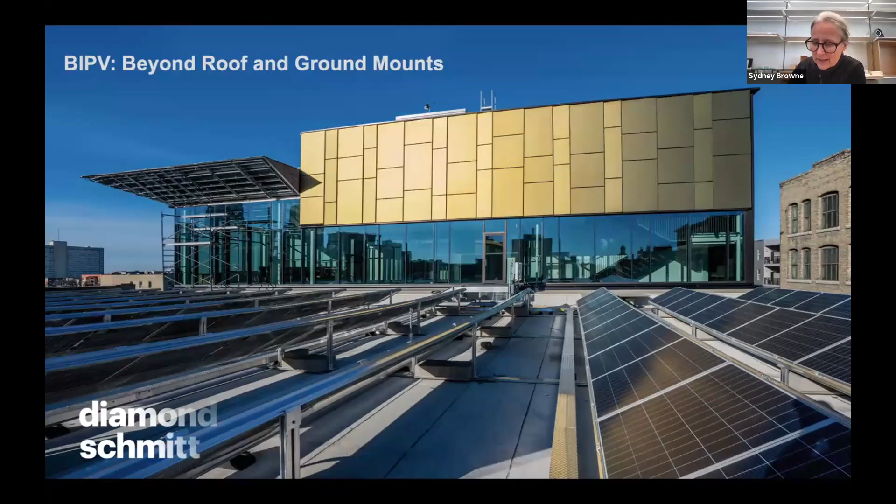Thanks so much. As Tyler mentioned, I'm an architect and a principal with Diamond and Schmitt. I'll share a little about our firm. Our firm is a group of over 300 architects, with studios in Vancouver, Calgary, Toronto, and a group in New York.

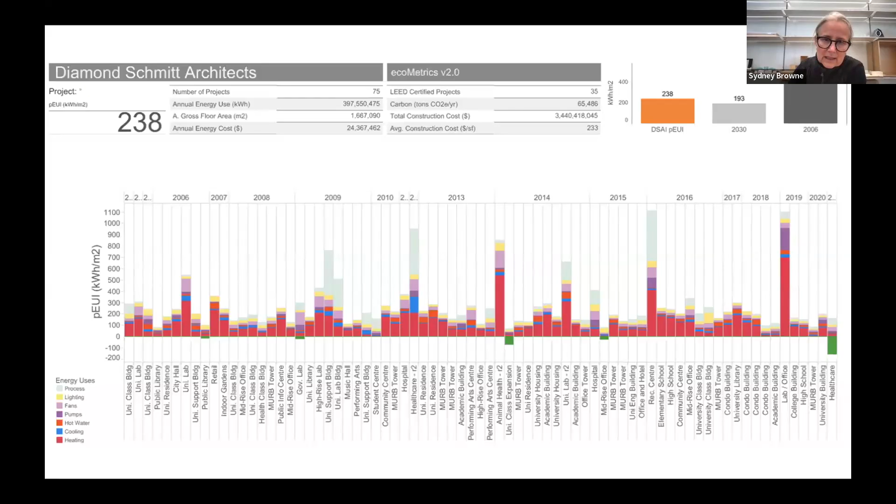That path has taken us in a number of directions over the last two decades, but the group of projects I'm going to speak about today are a selection from the handful you see on screen. We've been working with photovoltaics, building integrated photovoltaics, as part of our design work for some time, and over the last decade we've learned a lot and continue to learn through each one of these projects. I'll take you through a handful of these projects fairly quickly, but at the end of my presentation and Adam's, we'd be happy to go through questions you may have.

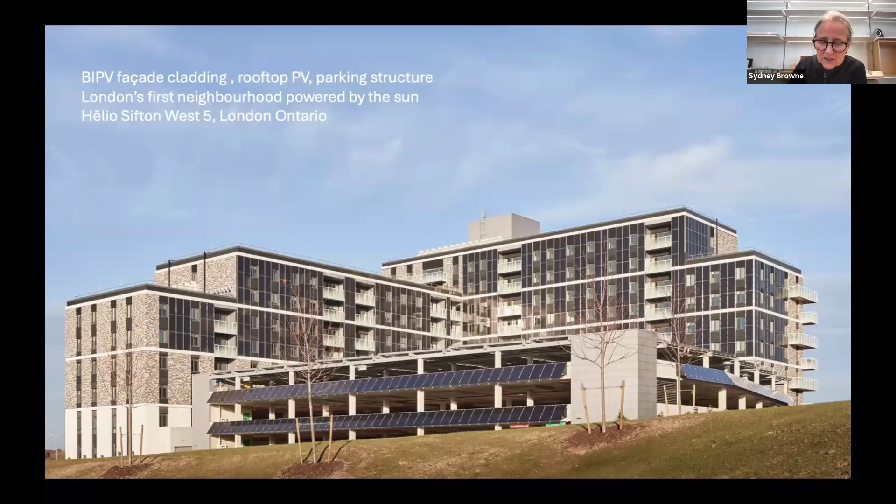This project made use of standard components as part of the exterior cladding system. As a continuation of our work with Sifton, we then worked with them on this multi-unit residential building. You can see on the facade of this building and the adjacent parking structure that in both cases the facade incorporates standard PV panels. What we were doing was taking the kinds of panels installed on the roof of those projects and looking at ways to incorporate them as part of the exterior cladding system, taking the vertical plane and developing it in a way relatively consistent with what's being done on the roof.

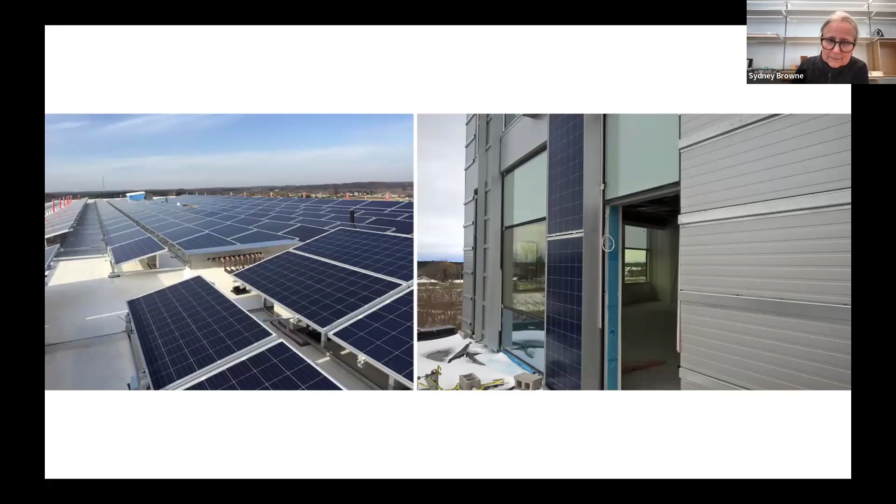Whereas the roof system on the left is added on top of the exterior roofing membrane, the facade on the right starts to take these panels and integrate them as part of the exterior cladding system. The challenge was to take these standardized, repeated modules of fixed dimensions and develop a series of details that could adapt those standardized panels to the customized detailing required as part of a more integrated building facade.

Again, just a test installation and not as fully effective in terms of output as the cladding, but we felt certainly worth installing as a test case in this scenario.

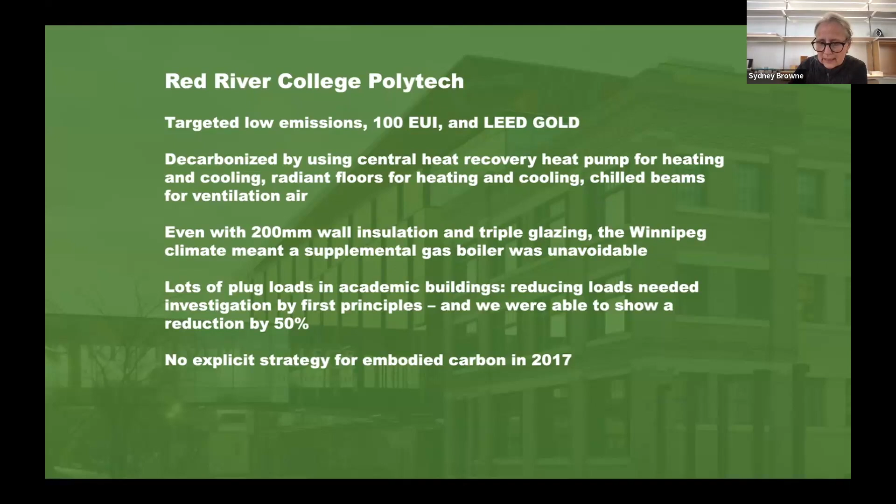At this point, we were very fortunate to take on a commission with Red River College Polytech in Winnipeg, for their innovation center. The college was really interested to see what could be done to develop a much more innovative approach that took energy use very seriously in an integrated way. This project was targeting an energy use intensity of 100 kilowatt hours per meter squared per year, as well as LEED Gold.

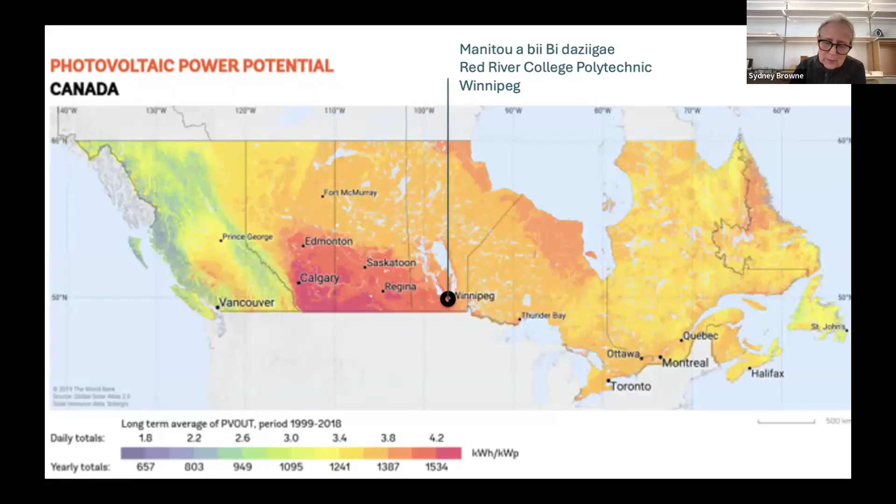This idea of making a much more holistic, integrated, energy efficient project began to lead us in a number of directions explored throughout the design process. This map shows the photovoltaic power potential across the country, and as you can see, Winnipeg is on the periphery of central Canada, one of the most beneficial areas in terms of long-term, year-round PV potential because of exposure to sunshine. So this we felt was a really promising starting point for incorporating PV into this project.

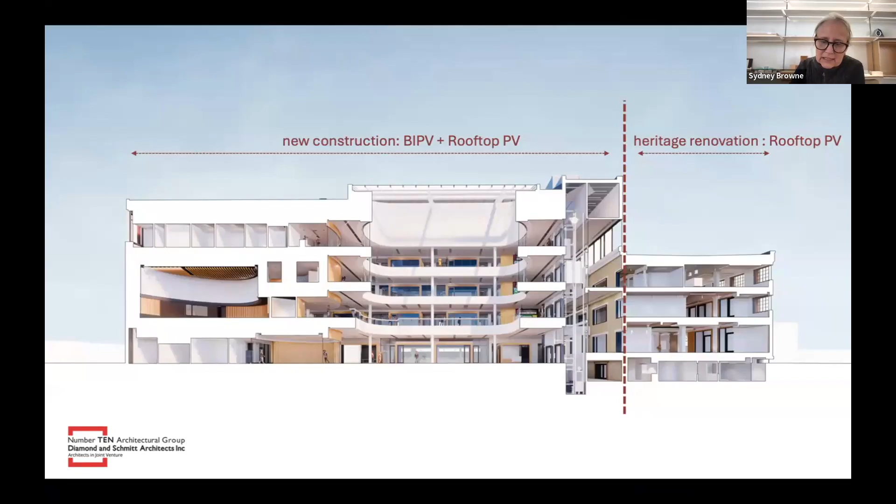The site we were given is located in the center of Winnipeg, a downtown site with an existing factory building on one side and a standard urban condition with buildings on most sides. The project included retrofit of an existing heritage warehouse, on the right-hand side of the screen, where we had the opportunity to incorporate rooftop photovoltaics. On the left-hand side, new construction allowed us greater opportunity to include rooftop PV, but also to begin exploring facade integrated photovoltaics.

The project that inspired some of this work, which we became aware of at this time, is the Copenhagen International School. It was one of the first European projects to incorporate a custom approach for solar facade panels as part of the facade construction. In this case, the facade panels, like the Sifton project I showed you earlier, are simply attached to a more integrated exterior insulated metal wall panel system. We were very interested to see the potential of this system and visited the project.

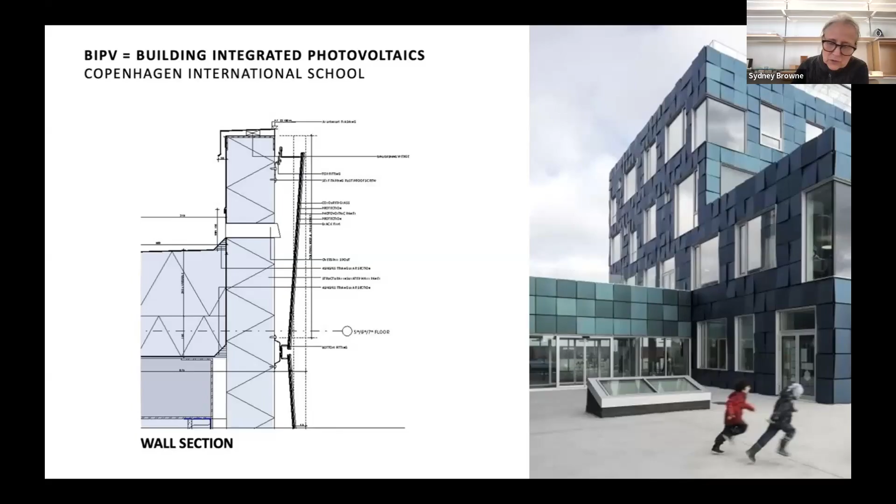For the Red River project, we started to look at what would be involved in taking on this kind of system, but really adapting it to a Canadian context where we develop rain screen systems, as Tyler mentioned, as part of our fundamental approach to building facades.

The glass that Solarlab, the Danish company involved in the design and fabrication of the Copenhagen project, brought to us opens up a whole new range of opportunities for color variation and customization of panels. At the same time, through construction, these panels incorporate the same solar cells within the body of each one.

So taking that standard approach, as you see in commodity panel systems, but beginning to look at what can be transformed in terms of appearance, size and customization.

The system we developed, working closely with Solarlab, is shown here in simple diagrammatic form. The interior and backup wall construction is similar to what we'd see in most Canadian construction projects: backup wall, insulation, sheathing, air barrier, and so forth.

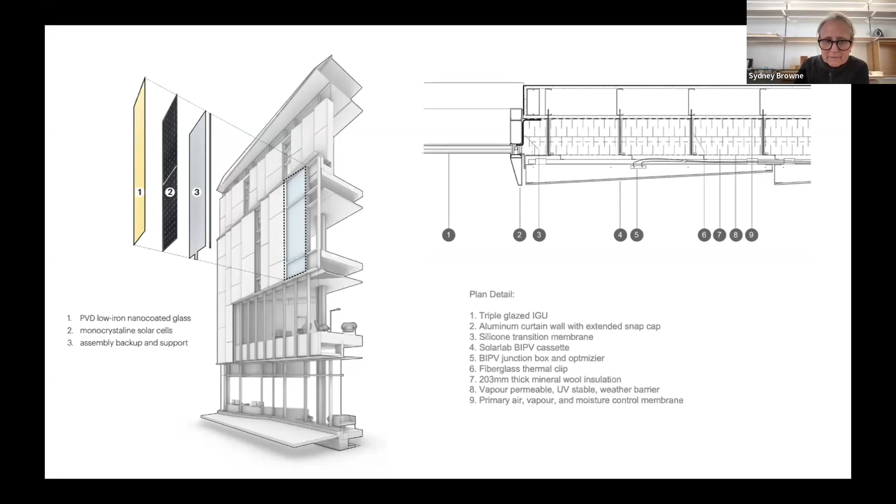But added to the exterior component, our cladding is made up of a special glass panel that includes a nano coating on the exterior glass, a series of integrated photovoltaic cells sandwiched behind that glass, and then a backsheet and backup framing that allows us to provide a customized exterior cladding system with room for junction boxes, cabling, and so forth on the back side of the facade. This diagram shows essentially the way that system is put together.

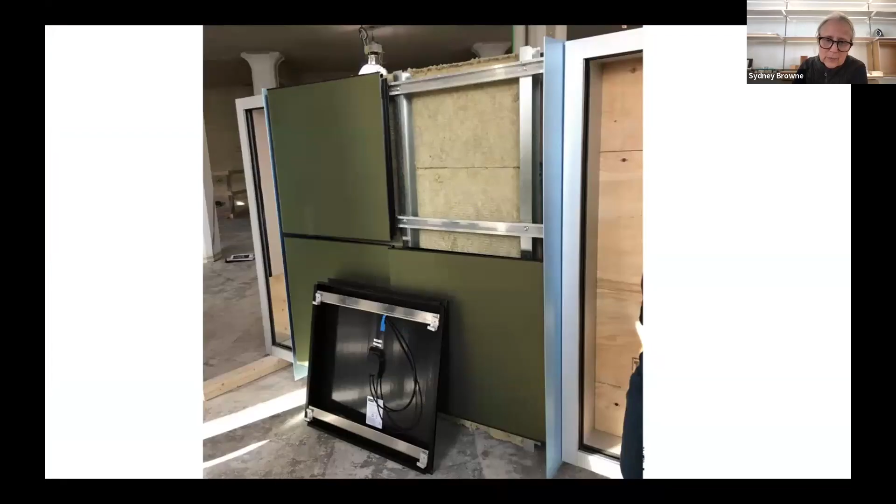In order to develop this system, there was a whole series of steps worked through with Solarlab and our construction manager: small-scale mock-ups for the construction industry and local building authorities, larger mock-ups developed on site in Denmark to test the assemblies at a larger scale, and eventually moving to mock-ups on site.

What you see here is the backup wall construction, which would be part of a typical rain screen construction, including air vapor barrier, insulation, Z-girts, and so forth. And then the first of the custom PV panels installed on site.

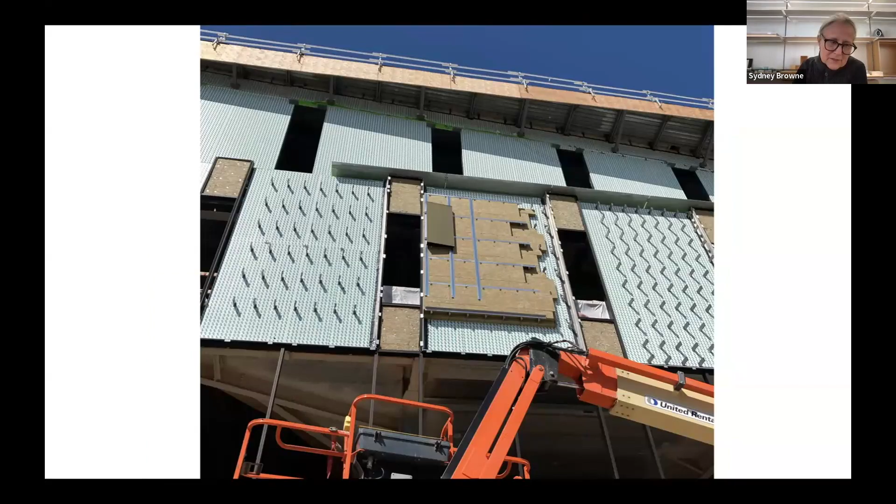That gives you some sense of the way the facade is put together, and ultimately this is what that exterior screen, rain screen, looked like.

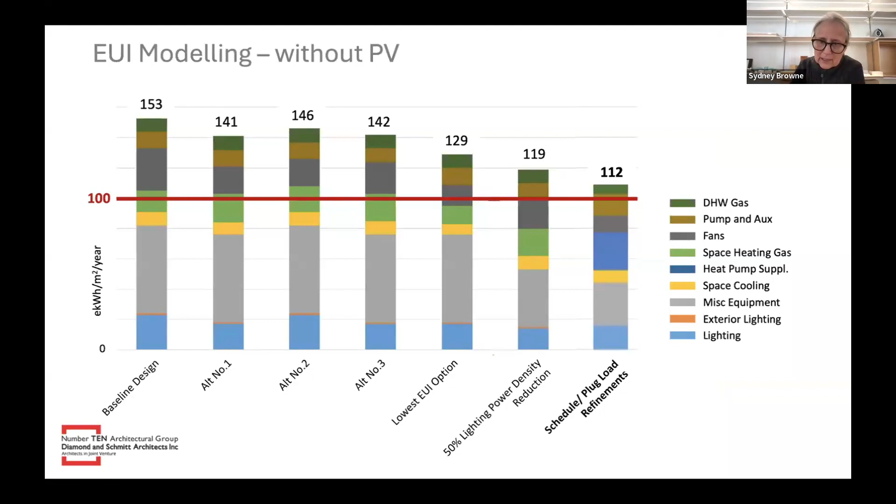In order to develop this process and ensure we were getting the output the college was looking for in terms of energy effective construction, we went through a lot of modeling throughout development. You see in this diagram a series of steps worked through as we progressively looked at ways to improve the energy efficiency and overall performance of the system.

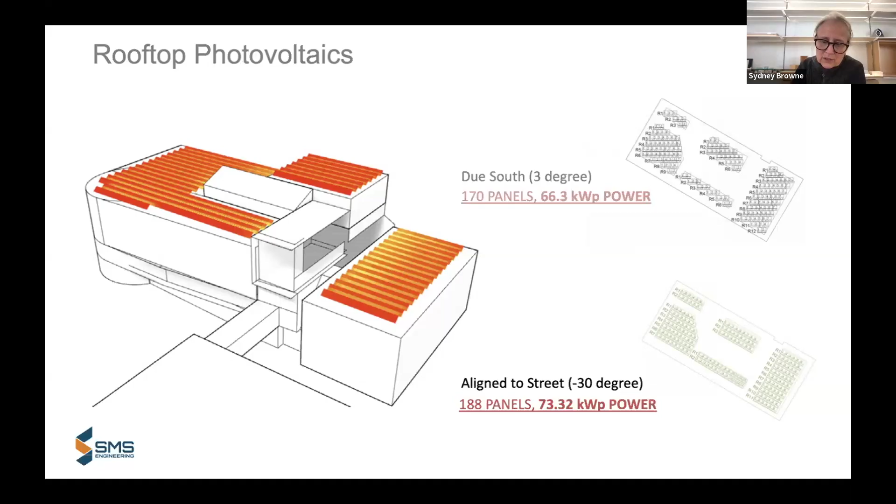Part of that process required that at a certain point we begin to look at on-site renewable energy. So we looked first at rooftop photovoltaics, and working with SMS, our electrical engineers from Winnipeg, there were studies done to consider the orientation of roof panels in order to maximize the output, and eventually looking in a more refined way at the optimal tilt for the roof panels.

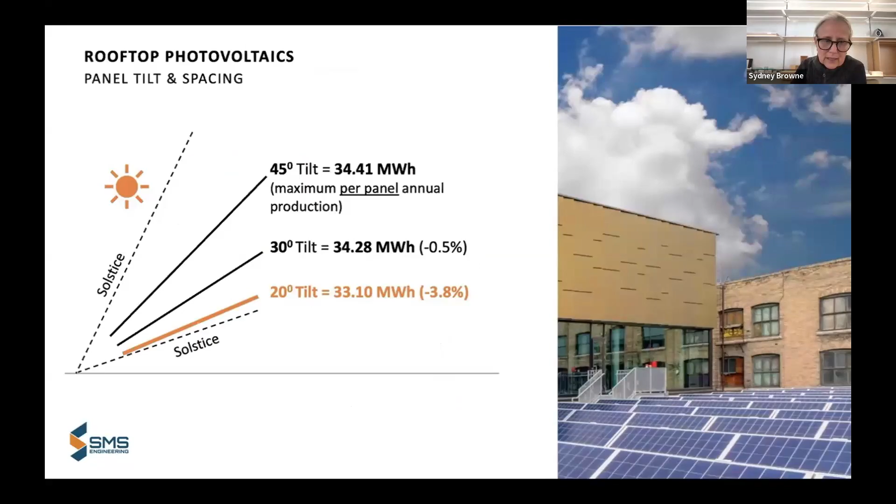Working with PV panels on the roof, however, was not enough to give us the energy output that was targeted for the project. So at that point, we also began to look at what could be developed in terms of building facade photovoltaic cladding.

As you see in the diagrams on the left-hand side of the screen, yes, there's a lot to be gained through angled rooftop photovoltaics, but there's also a significant benefit we found through early modeling to incorporate photovoltaics as part of the cladding for the exterior envelope.

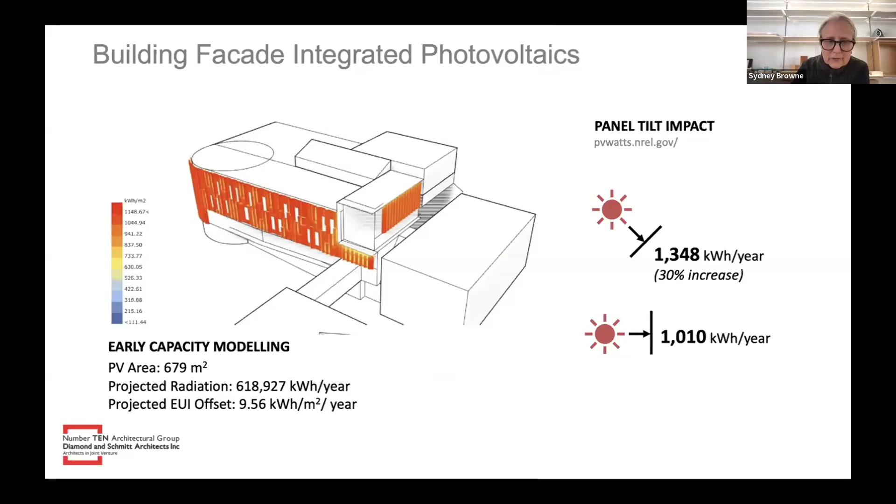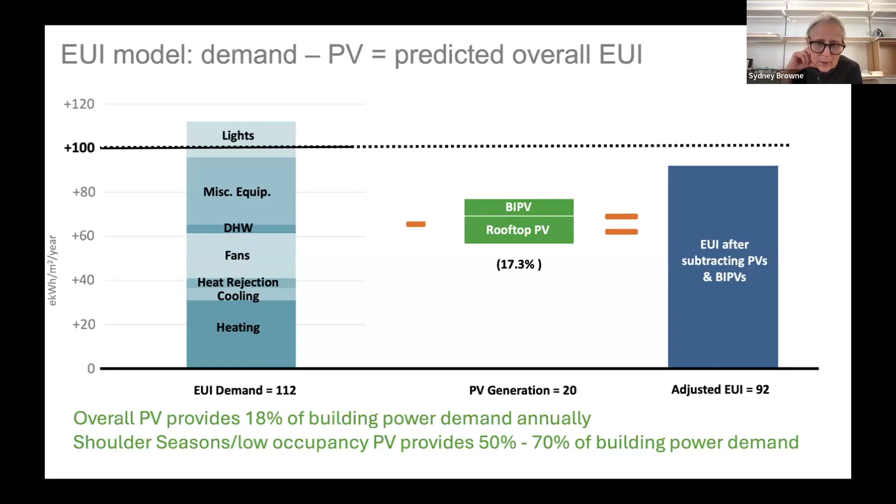In adding that rooftop photovoltaic and cladding component, we're able to take the overall EUI demand of the building, which was still just a nudge over 100, 112, and add the opportunity for PV generation, with the resultant combined performance falling well within the 100 EUI target.

The end result of that is cladding and rooftop PV that provides overall close to 20% of the electrical energy required in the building overall, and has contributed significantly to LEED Gold construction for the project as a whole.

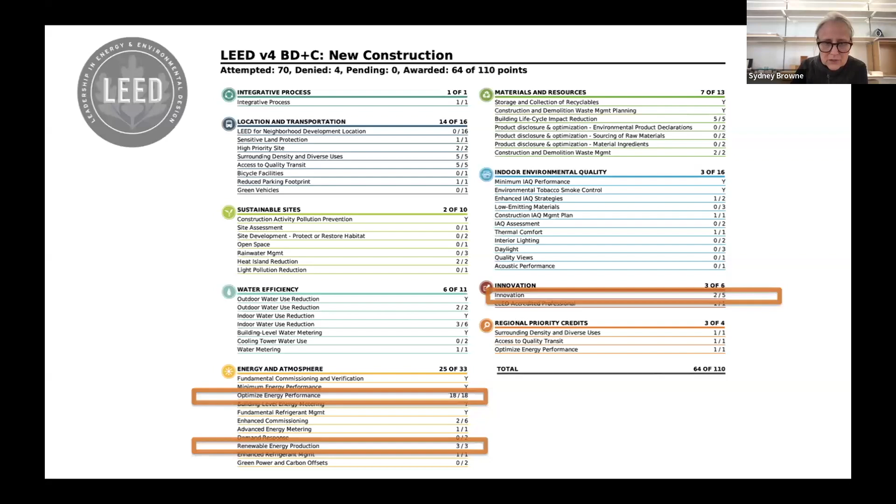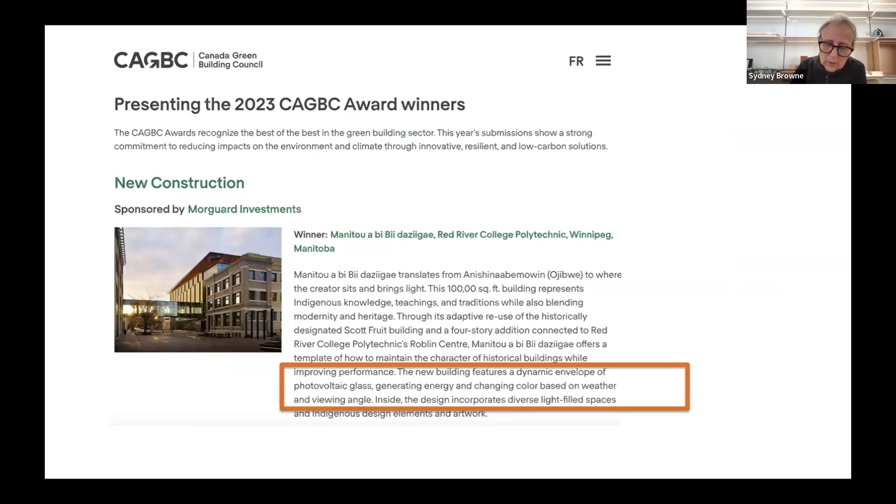The project is now LEED certified, and it was, I think, successful in many respects. One of the ways that was recognized was through the Canada Green Building Council Award for New Construction in 2023. One of the reasons they recognized the project was the cladding, which incorporated photovoltaic glass, first of its kind in Canada at that time.

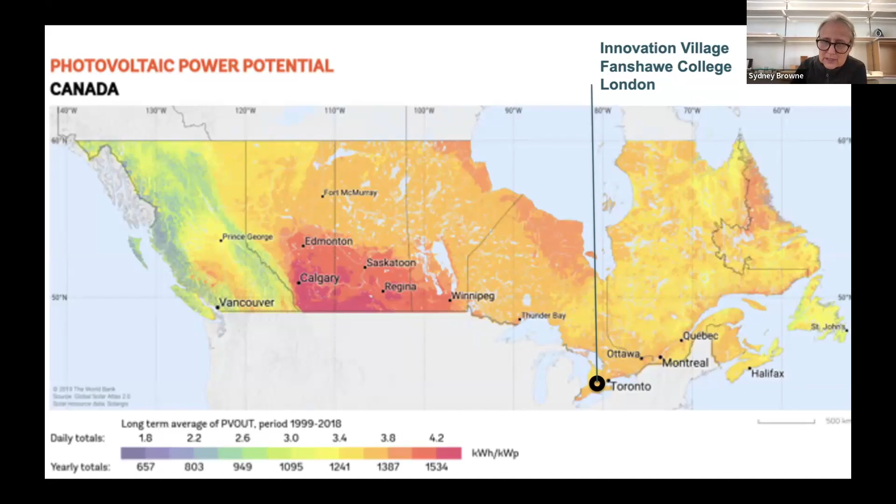I'll just move very quickly on to a second project. We were so encouraged by the success of the Winnipeg project, but we knew it was in one of the sunnier areas of the country, and we wanted to test out what the opportunity was for similar systems in other parts of the country. So the next project where we took this on was through the Innovation Village project for Fanshawe College in London.

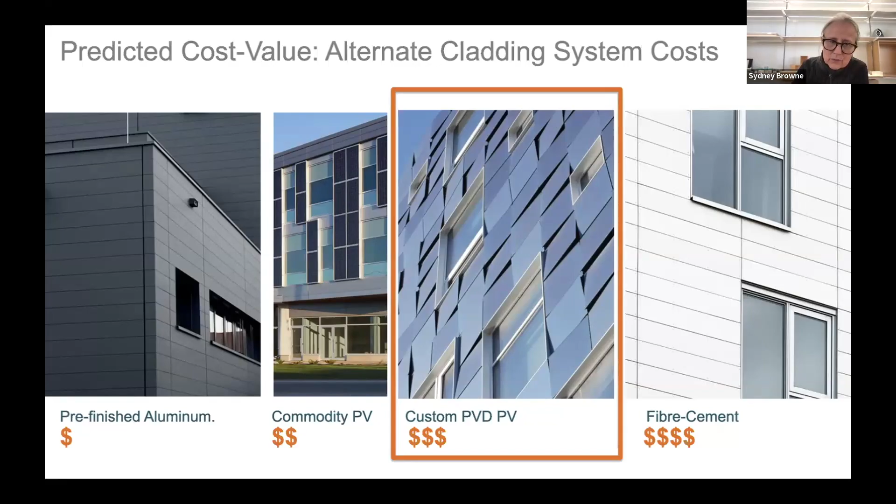We knew from cost studies that the custom photovoltaic cladding was well within the range of the types of cladding systems we would be looking at for similar quality construction in this market. We were very interested to test out what could be gained through energy production and what value that brought to the site. So what you see here are section details for this building.

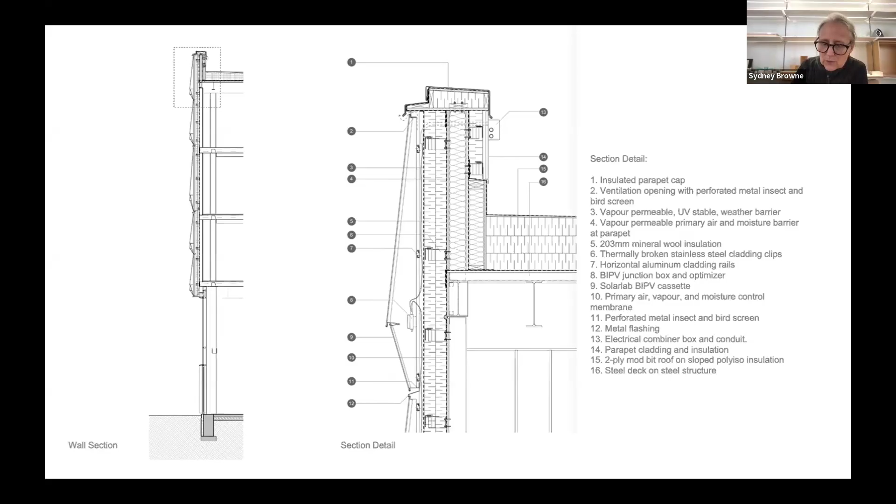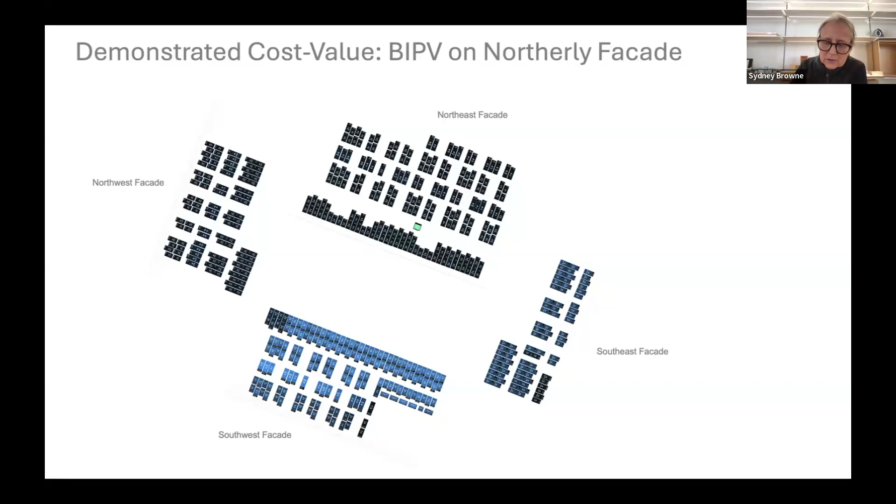So this has been up and running for a period of time, and as I said, we're very interested to understand the performance of these systems. In this project, there was serious attention given to the benefits of putting PV on all sides of the project, and early modeling suggested this was a viable approach, which has been borne out in the demonstrated data tracking available to us since the project has been in use.

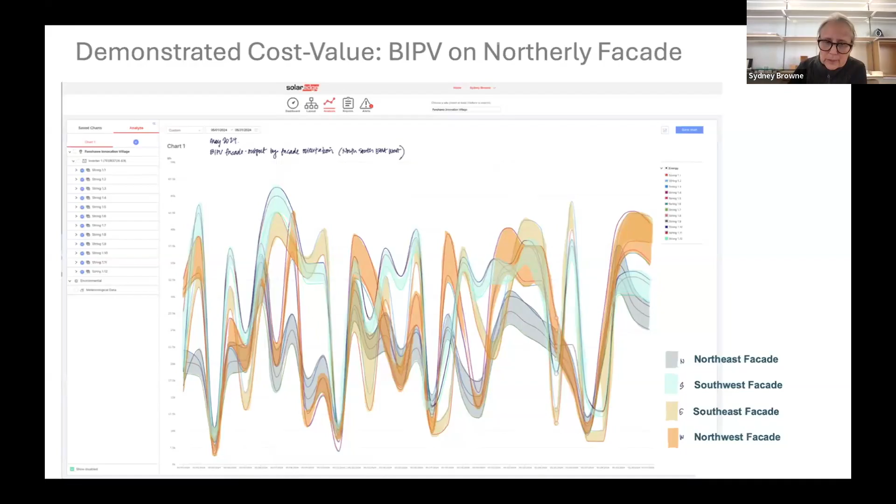What you see here is a simple diagrammatic markup for one month, looking at each color band to track the output for each facade. You can see a color assigned to each of the building facades, and the orange band is well in the running in terms of output generated, clearly demonstrating to our team and the college the benefits of looking at PV on all sides of the building as part of an integrated facade approach.

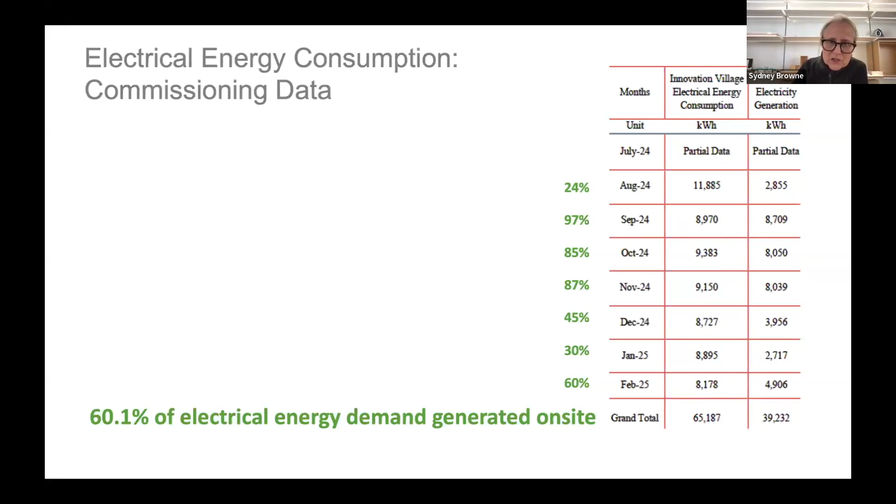So those are two projects in particular that we've looked at, but I just wanted to give you a quick sense of other work in progress.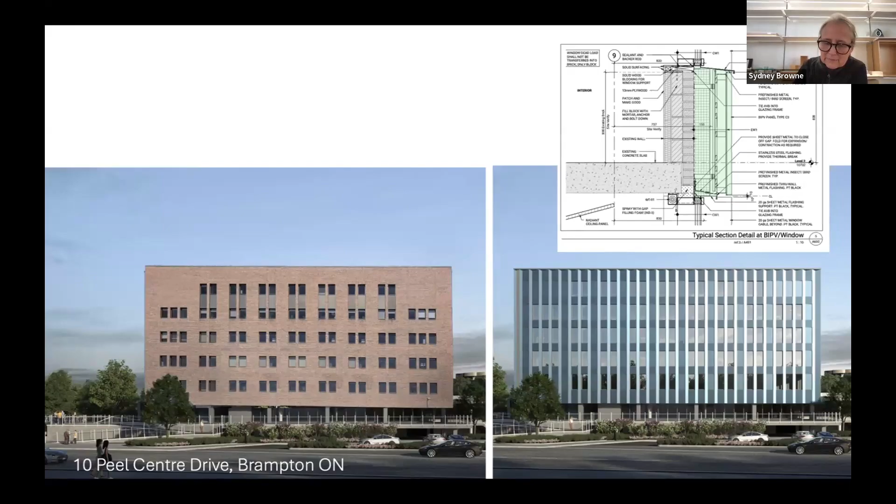The last two projects I showed you were primarily new construction, but we're also seeing huge potential in terms of deep energy retrofit, as in this project for the region of Peel, where we're working with them to look at replacing and upgrading, expanding windows, and recladding the building, retrofitting interior systems to electrify the building as a whole. The results demonstrate in modeled form that we're able to cut the building EUI from somewhere over 300 kilowatt hours per meter squared to close to 100 - really significant improvements, with a significant contribution coming through overcladding with BIPV.

Tyler had mentioned one of the projects we're involved with is at Adisoke for the Ottawa Public Library and Library and Archives Canada. This project is under construction now. It's connected to a district energy system, and is our first combination of renewable on-site energy with a district energy system. This is targeting a zero carbon design, and is well on its way.

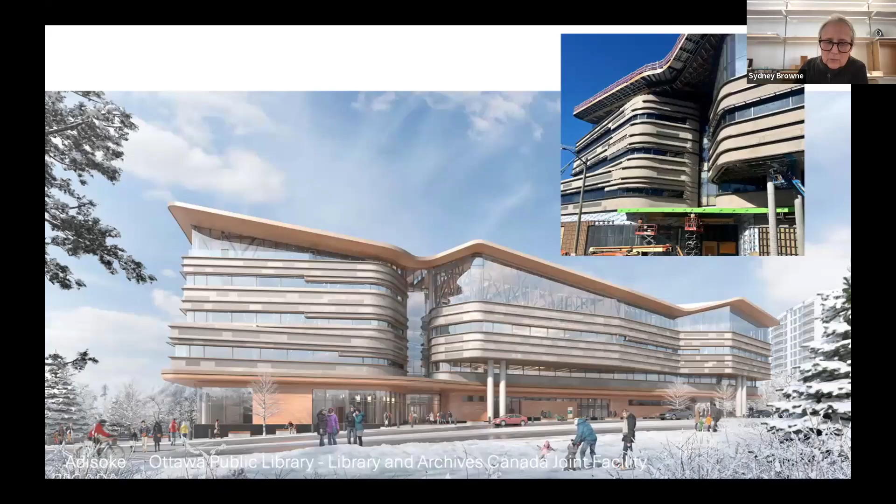Just recently, we've opened the Barrie Bus Terminal, where a building integrated photovoltaic canopy is providing all of the power required to operate the adjacent bus terminal. This is the first project we're working on where we're able to start looking at feeding back into the grid.

And then lastly, just one more project, the Myron and Berna Guerin Health Sciences Complex, a new medical school in Ontario, where for the first time we're able to work directly with a Canadian manufacturer of building integrated PV panels. This project is again well on its way - you can see the mock-up in the photo on the left.

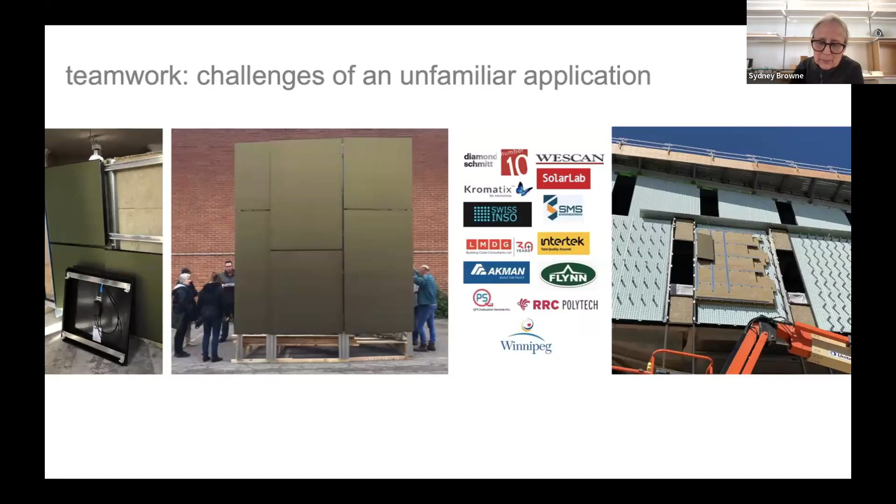So these projects are learning opportunities for all members of our project team. I just wanted to close with a few comments. First, every one of these projects has its own set of conditions, and the solutions we look at vary considerably from one project to the next. But fundamental to all of these is the idea of teamwork, because this is a new approach to construction and new technology, often involving trades and construction partners who do not normally work together in close partnership - teamwork is essential to any one of these projects.

I'd also add that while it sometimes brings new working relationships for our team, it also brings new requirements for testing at multiple stages, and for working with the authorities having jurisdiction. Ultimately, this is a learning process for all members on the consulting team side, but it's often something new for the authorities we work with, and working closely with them is a necessary part at each stage of these projects.

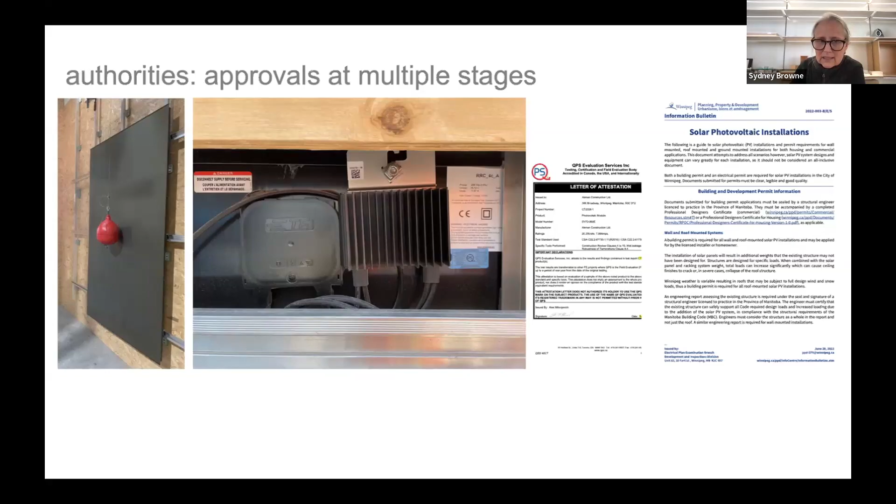Once they're in place, though, while the project that leads to construction can be more complex and requires extra effort, the end results are remarkably simple and productive. When we think about all of the mechanical components that make up many of the building systems for these projects, which you see identified on the right, the simplicity of the photovoltaic cladding systems is remarkably dependable and productive, and we see huge value in continuing to work with the combination of these systems.

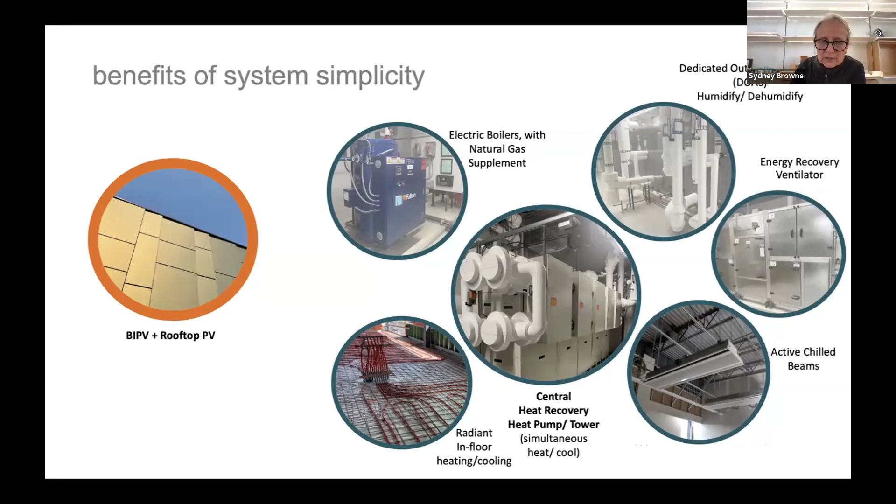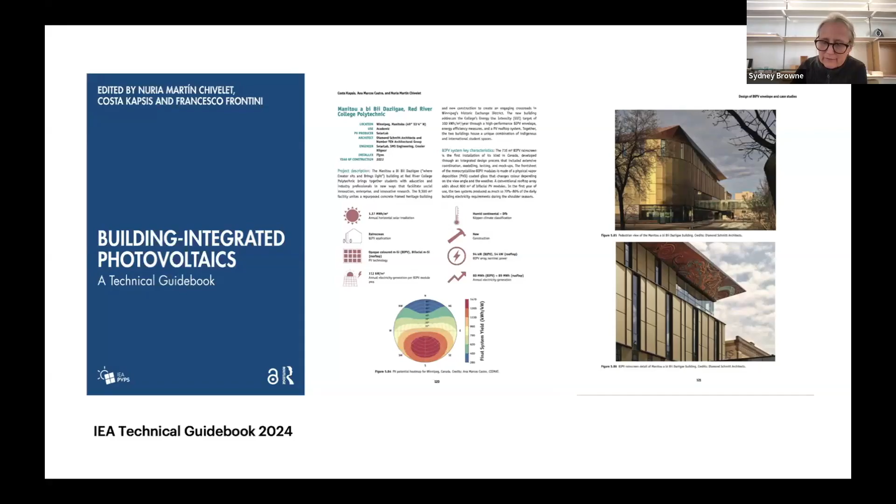Just in closing, we're learning as we go, but I think we're part of a whole industry that's learning, and there are more and more resources available all the time. The Building Integrated Photovoltaics Technical Guidebook you see here is now available online. We're happy to have both the Red River and Fanshawe projects included in that international publication, with a number of valuable resources and great information available through this guidebook. Additionally, through evolving national standards, CSA has been developing a series of updated standards for PV components and BIPV over the last two years, an important part of this evolving industry.

So I'm going to pause here. As I said, this is just part of the work we've been doing over an extended period of time. We learn with every project, but one of the things that stands out most is the enormous potential with this technology, and we're happy to share what we know. So at this point, I'll pause and ask Adam to take over the screen.

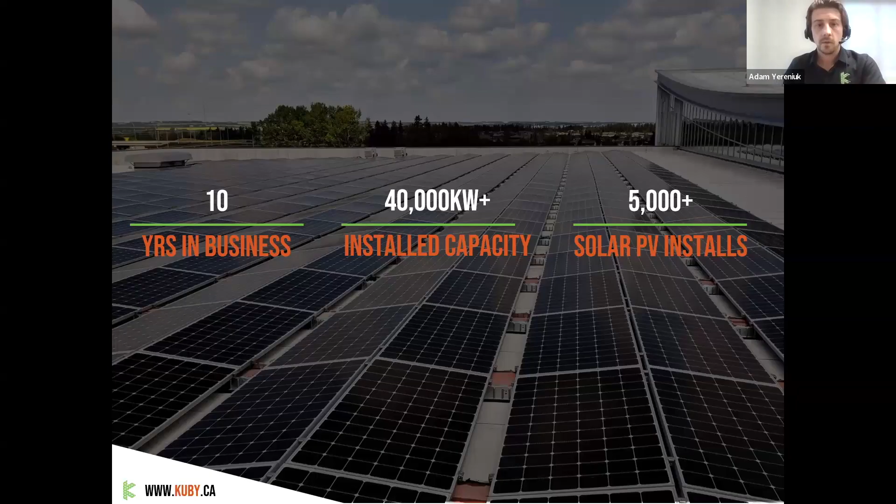So let's jump into some projects. This is Red Deer Polytechnic Residence Building. Now, everything you see here is a photovoltaic panel. All of the black is all photovoltaic cells.

So the architect behind this job was Reimagine, formerly Manasc Isaac. I believe it was built by Clark, and the engineer of the system was Atco. Kuby performed the module installation and the DC and electrical installation, installing all the panels on the racking system and interconnecting everything.

This project is in Red Deer, and it coats three faces of the building. The west, south, and east faces are all covered in solar panels. It interconnects into 6 string inverters. In total, there are 545 295-watt modules, which at the time of construction were some of the best available.

And now these days we're doing panels over double that size. But 545 pieces of photovoltaic glass and approximately 50 pieces of dummy glass, meant to look like the surrounding photovoltaic panels but not generating electricity or interconnected into the system, matches the aesthetic. So this project overall is just under 161 kilowatts DC.

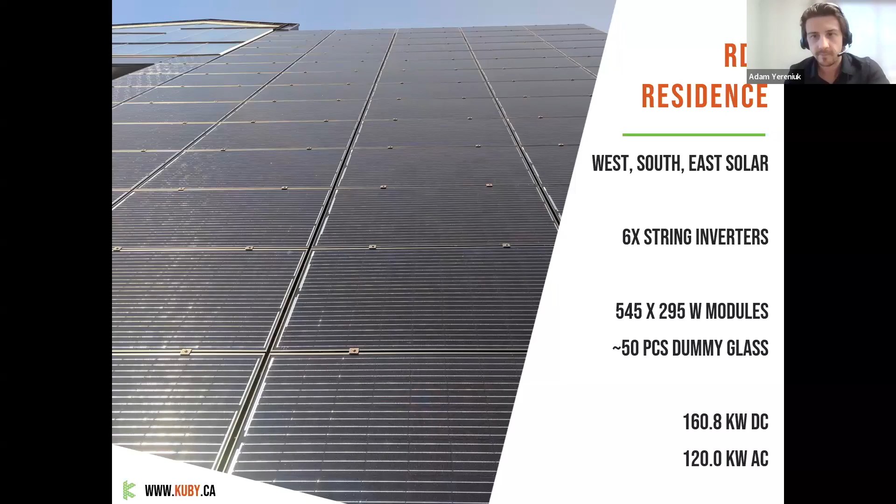So this project was completed using standard solar panels, just like the initial one Sydney was sharing, onto a racking system with a typical siding underlay. Nowadays, there are products out there that can do this differently, more meant for the application. Looking at some of LMX's products, those would have been very handy for this project.

So here's an image during construction. You can see it's very typical siding construction.

You have your underlay, you've got your insulation, you've got your Z girts, and then on top of that was solar PV racking and solar panels installed over the top. This one was using typical solar panels, coating every single side of the building. The construction was completed largely working off of zoom booms and man lifts.

One thing to note is that tolerances are very important, as you can imagine. If you're off by one inch or a quarter inch on one side, you're going to be off by 2 feet when the other side hits.

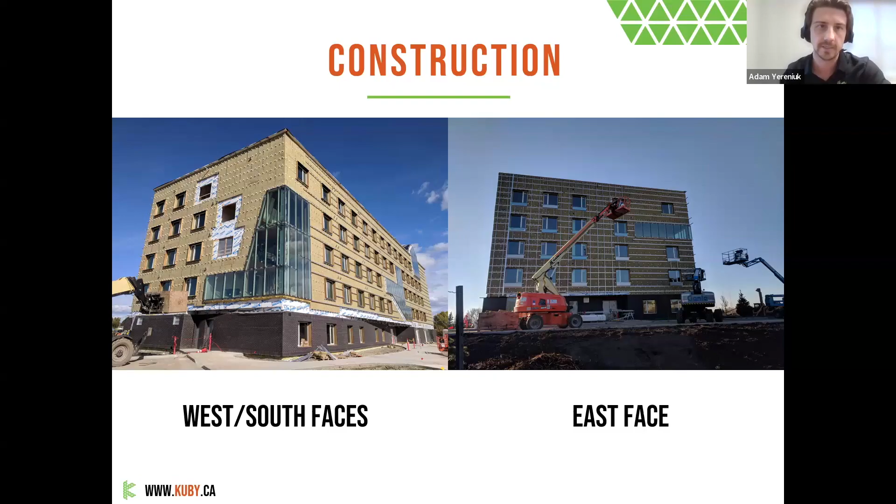The next project is one of Alberta's most iconic buildings. This is the Edmonton Convention Center. This was built by Bird Construction. The architect here was Dialogue. The glaziers on the system was Flynn, and the engineer was Gordon Howell with Howell Mayhew Engineering. Kuby completed the module interconnections and the DC wiring up to and including the inverters.

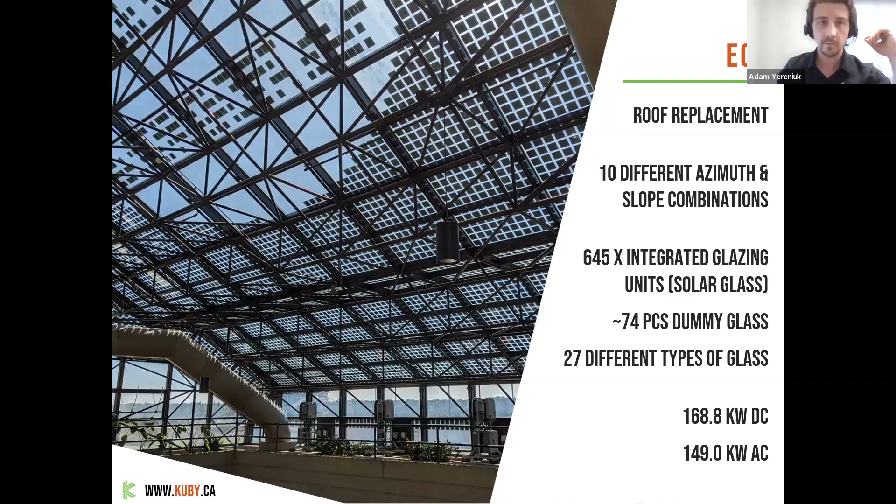And if you're not aware, electrically, you can't just connect any two adjacent solar panels to each other. You have to match them with similar slope and azimuth and electrical characteristics. So the flat section of the lowest row had to meet the flat section of the second row. The angled west section had to meet the angled west section of the row above it, and so on.

The job was particularly challenging because it was completed in winter, 2019-2020. It coincided with some high school graduation party, so there were often herds of drunk kids wandering about into the work site. Most of our work was completed from the exterior, so we were up on the roof for the majority of this. And then, as you know, in 2020, the pandemic hit, and that tossed a giant wrench into everything.

Another big aspect of this job was the weight of the glass. The weight of the new photovoltaic glass was significantly higher than the original glass that was installed, and that demanded that the structural members of the building frame get upgraded.

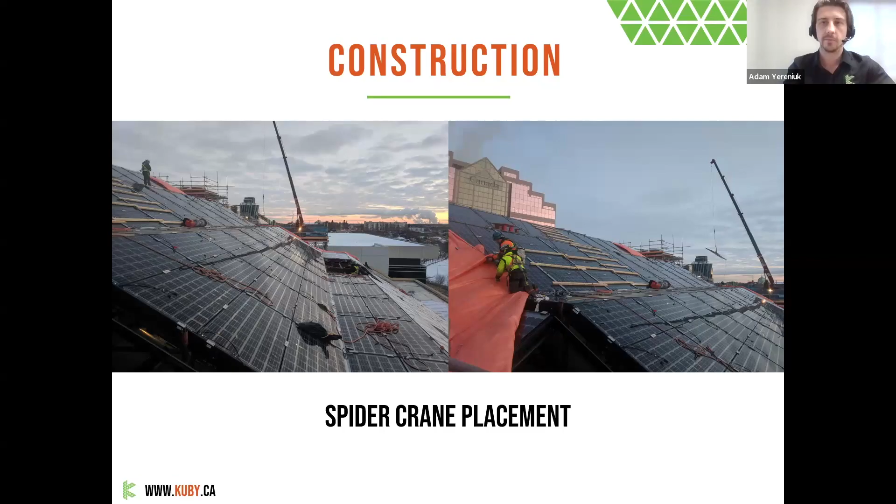One thing to consider with BIPV that's different than any other kind of facade or glass system is wire management. Architects and engineers pay special attention with BIPV projects because now you have to account for wires running through the system, which is not typical with glass facades and roofs. So this project had wires running on the exterior through designated wireways, and you can see all the panels would eventually come together near the bottom on this south facing.

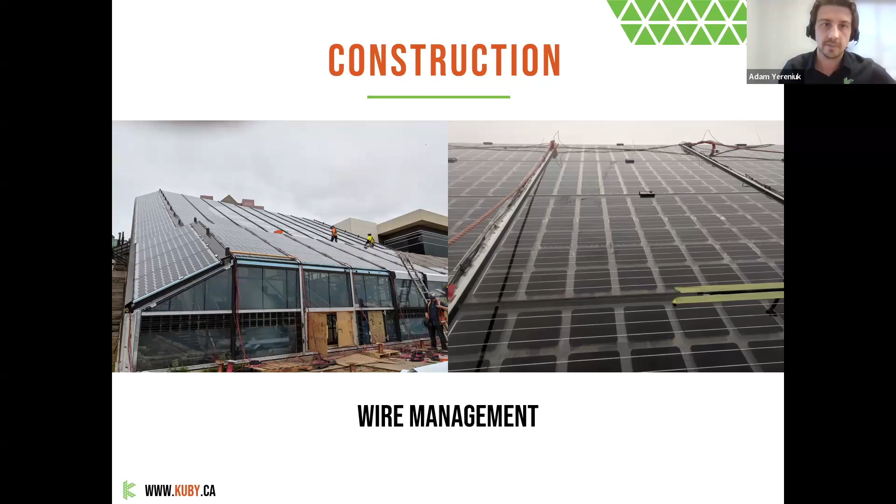You can see our now general manager Simon looking quite stressed out about all the wires he has to deal with. But this is a really good example of working with the authorities having jurisdiction to make sure that they're comfortable with the new technology or the new techniques being used, because often interpretation is required. The sooner you can get on good terms with them and outline all the safety considerations you've taken care of, the better off the project will be.

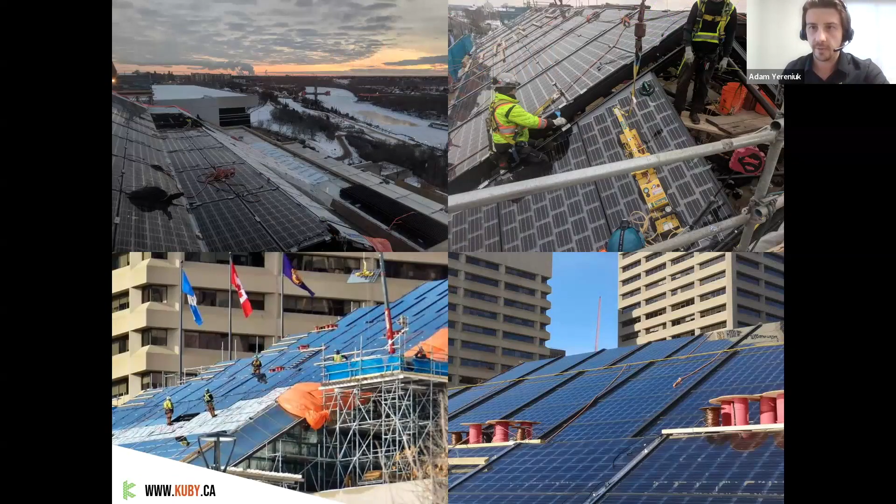Here's a few more random construction images that show the scale of the project and give a glimpse into the logistical challenges. On the bottom left, you can see the scaffolding roughly halfway down before the final stage was built. On the top right, this is actually on the north-facing roof, which, as mentioned earlier, you can certainly use north faces if you need to. They're not going to produce as well as south, east, or west, but if you just need that little bit of extra energy, or if it wouldn't make sense to not have the north look the exact same as the south, east, and west, then by all means, you can definitely use it.

This just shows the crane hoisting all the glass into place with the glaziers doing their thing, sealing it all.

Some of the big lessons learned on this one: if you can, try not to do such a project in the winter. If you do have to do a convention center project, try to avoid a high school grad season. Pay special attention to wire management—it's a relatively minor scope, but is critical to the aesthetics and the function of the array.

I definitely recommend string inverters versus microinverters or optimizers, strictly from a maintenance perspective. If you have lots of microinverters or optimizers, they're going to fail, and now you have to access some really hard to reach places on walls or on roofs. So string inverters, if at all possible.

So that was that project. I'm going to go through a couple more slides that showcase some BIPV applications. This one's not technically BIPV, but it's kind of BIPV adjacent. This is a project we did using Mitrex glass, and these panels were coated with a shingle image to allow them to blend in seamlessly with the roof. This just showcases that solar can be much more than just standard blue square cells on a white background or glass background.

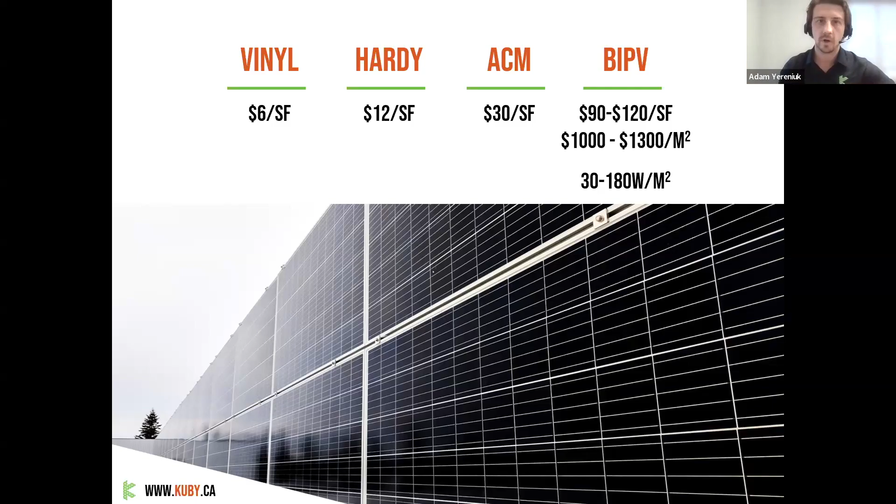So I included ACM as the primary comparison, which is more on that level of premium siding finish. Some different costs: I have vinyl at $6 per square foot, scaling up to ACM at $30 per square foot, and BIPV panels ranging in the $90 to $120 per square foot. These are all rough estimates - we can certainly drive that down below 90, and certain applications could be above 120. Using the color palette from the previous page, you can see the range is from roughly 30 to 180 watts per meter squared.

So here's an annual cash flow scenario. This is hypothetical, for an approximately 500 meters squared vertical wall that is facing south in Calgary, Alberta - roughly 5,400 square feet. I assumed it's going to produce roughly 1,000 kilowatt hours per kilowatt installed, all facing south. If you have panels facing east, west, or north, you're going to produce slightly less - east and west on the order of 20 to 30% worse than due south. I assumed a 15 cent per kilowatt hour, escalating at 4% per year to get this.

This doesn't include labor. However, the labor will be somewhat similar for both standard cladding and BIPV cladding - BIPV will be slightly higher because a second trade is often required, this is where you need your electrical contractor. There might be some additional engineering and architecture time for BIPV systems. What you're seeing here is the annual cash flow for a BIPV system at $90 per square foot. The capital investment is just under $500,000, and then every year after that, you're going to be making roughly 10K to 30K from the energy savings.

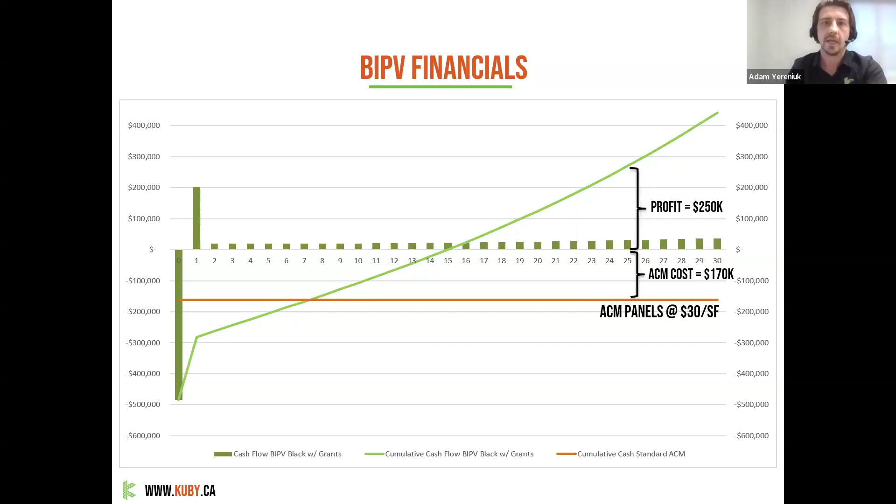So I'll leave this up here for a quick second if anyone does want to take a screenshot. But I think it's just important to highlight the long-term value of solar. It does pay off, but it takes 10, 20 years-ish. And beyond that, there's some difficult to quantify architectural advantages. Like many of the buildings that Sydney was just highlighting are stunning, and you can't achieve that without doing some of this cutting edge technology work.